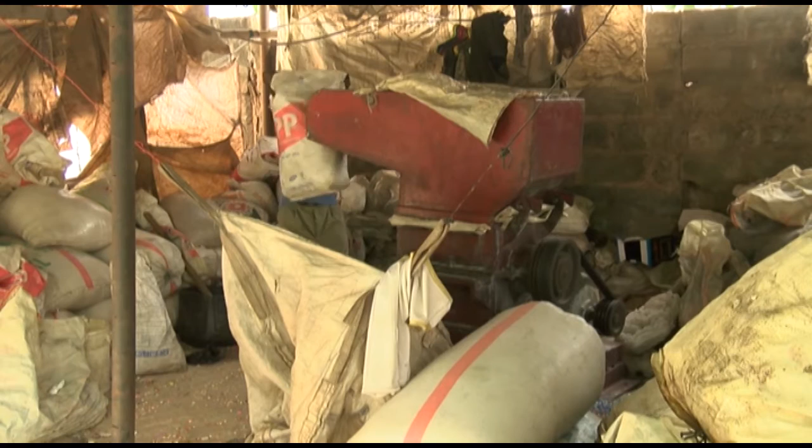After about 5 years of trading on it, I now decided to go into the full production of plastic manufacturing. In the course of doing that, I started with buying molds. There's things we call molds. I started buying the molds. I bought in that year, 2004. I have no machines.

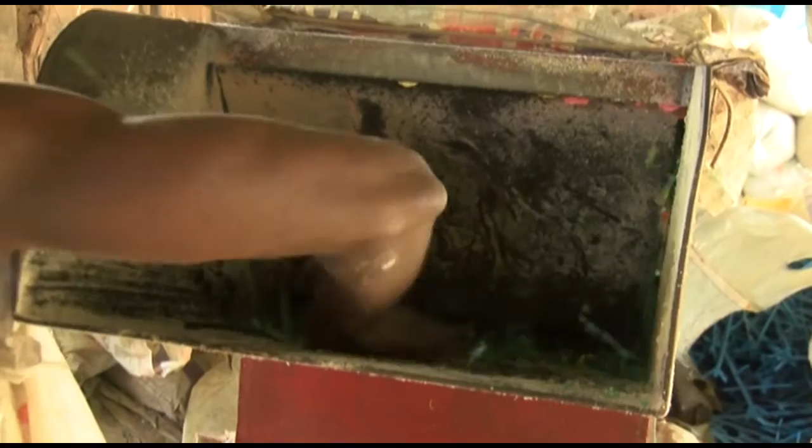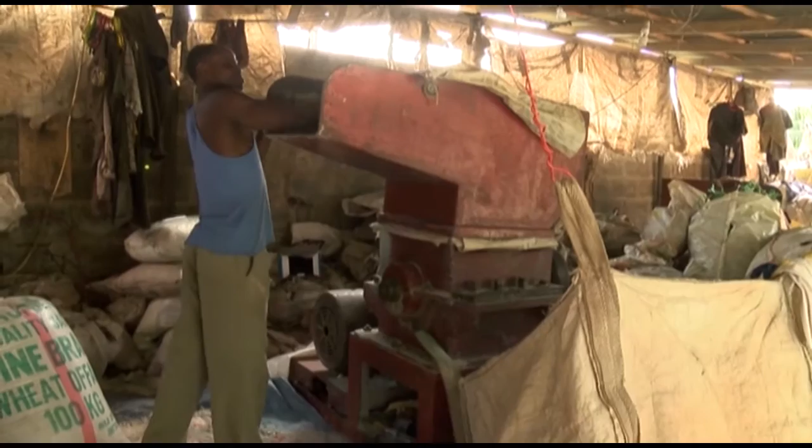We go for what we call contract production. We meet people who have machineries. We give them our molds, and they produce for us, and we pay them, while we now supply the industry. So after about 5 years, or less than 5 years, we started thinking of doing the production ourselves. We started buying the machines, though fairly used then. We started buying the fairly used ones. We started producing. It was really moving.

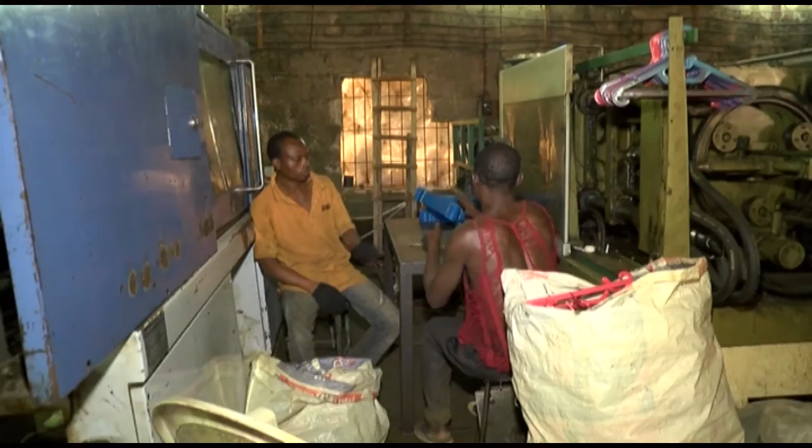As the demand for plastic packaging for pharmaceutical products increased, there was pressure to meet up with supply. We needed more machines because we had more customers. Then we approached the BOI Anambra State government for loan. Initially, when we go to other commercial banks, their interest rates are very high, say about 27–28%.

But when we approached the BOI, the Anambra State government, the interest rate was a little bit considerable, 10%. So they gave us 2 machines last year. They commissioned it. We started producing.

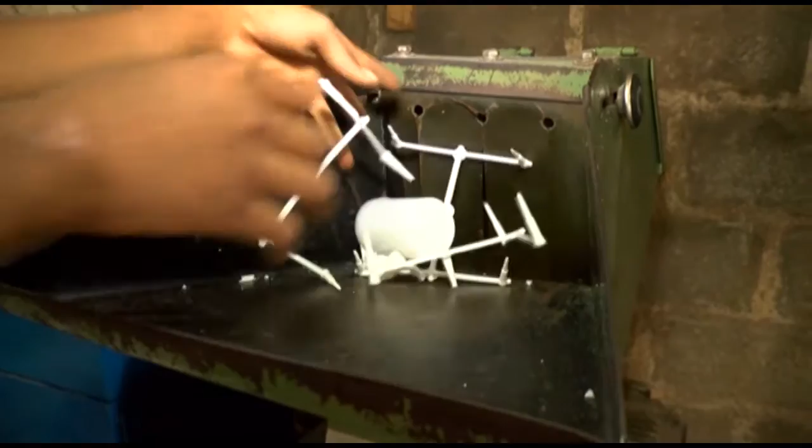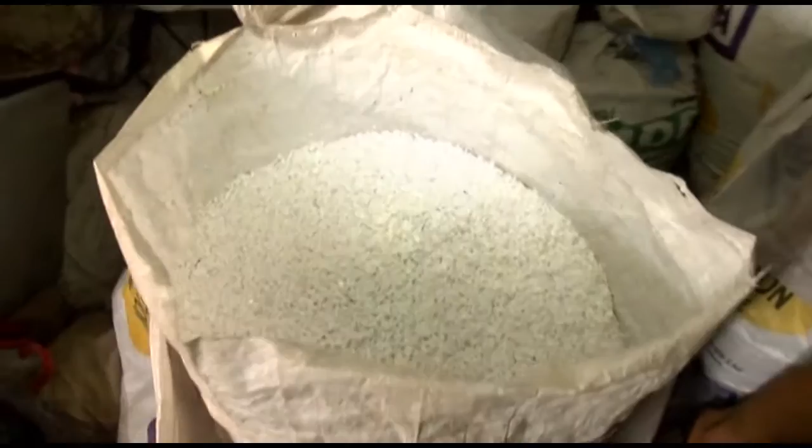The manufacturing process of plastic packaging is quite simple, provided the right machine is used. Raw materials are like this. You go down now, you will see that we buy them locally from Indorama Eleme Petrochemical, made in Nigeria. That's where we source our raw material. And this raw material goes through the hopper.

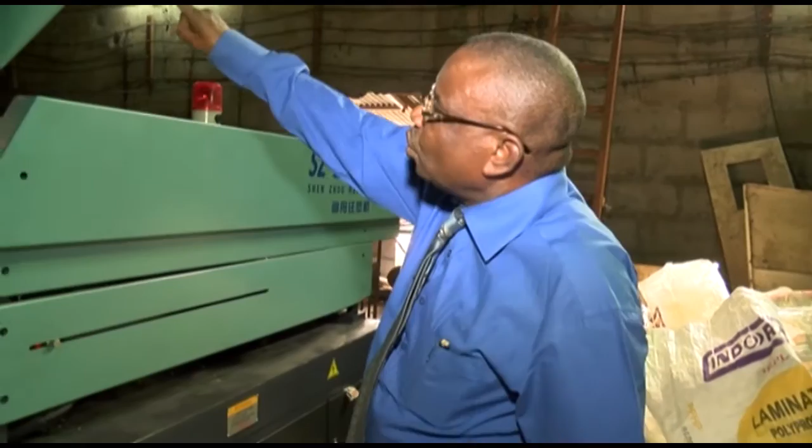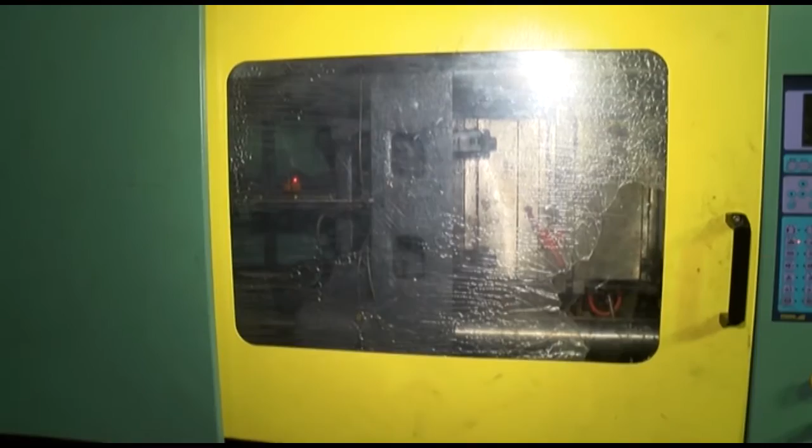When it goes through the hopper, it now melts in the barrel. We call this barrel. It melts and goes through the barrel. As it goes through the barrel, it comes here, it melts and gets into the mold. When it goes into the mold, as the mold closes, it will now inject. As it injects, it will now form this plastic container that will drop on its own. Now it is dropping.

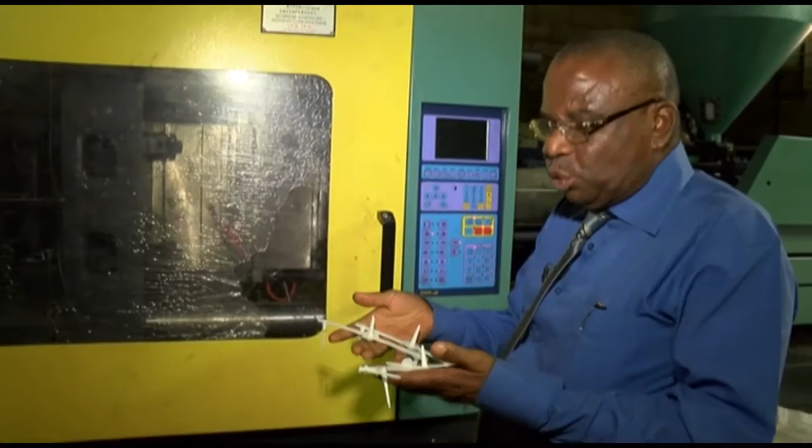Good. So when it drops together with the waste, because these ones are waste that we can recycle in the near future. We can use them for plastic hangers. And this material is purely virgin because they use it for pharmaceutical packaging because it is edible. So we don't use recycled materials for these products because they are purely for pharmaceutical packaging.

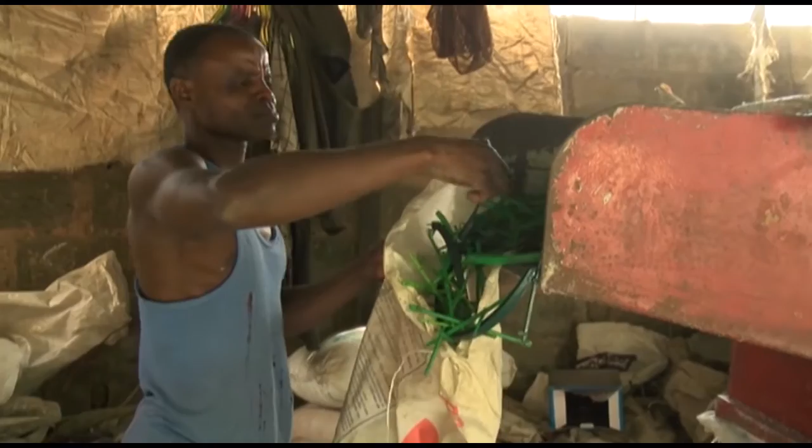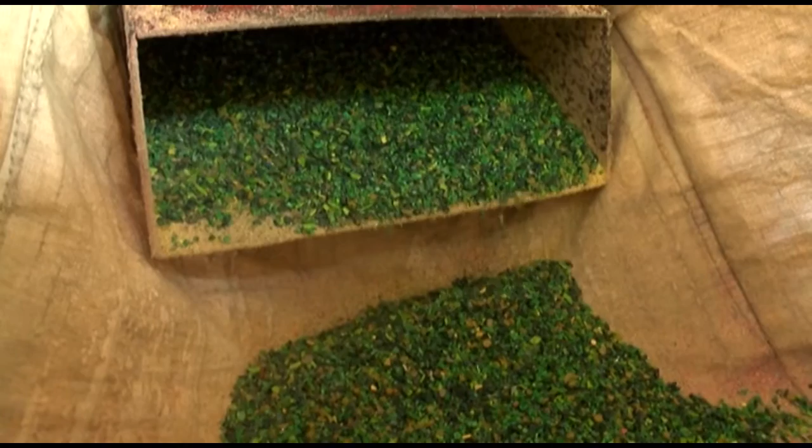In this business, nothing is left to perish. The waste from the production process of the pharmaceutical packaging is taken through the crusher and converted into pellets. These are then reused for the production of hangers. The plastic hangers, we use the recycled materials. That is more reason why most of our materials, we don't have waste. The runners we have in our product, we now recycle them, put them through here, where it goes the same process to make the plastic cloth hangers.

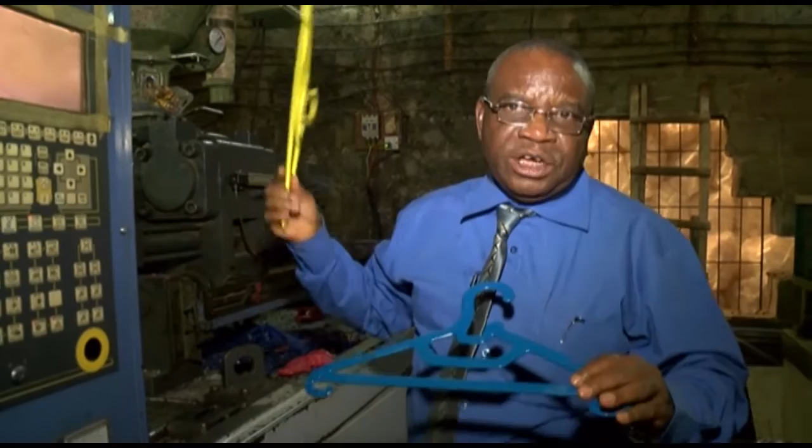And they are already made in Nigeria. So we didn't say made in Africa and in China also. We really have that in our business, made in Nigeria.

We were in Abuja sometime last year to showcase our products at the presidential villa. I showcased this plastic cloth hanger. He saw it and said the cloth hangers are very beautiful. But the problem he has is that here is so narrow that big jeans could not get into it.

So when I saw it, after about 2 months, I traveled again to make a new one, now to make a very good clearance so that I can have enough room for more jeans. You can pack 2-3 jeans here, unlike this one that is so narrow that you cannot pick up 2 or 3 jeans. So I've corrected that now. And I'm proud of that because it's marketable right now.

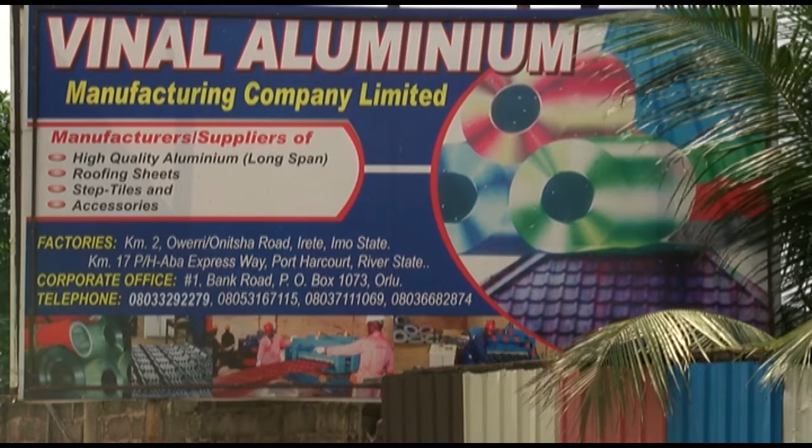Vinal Aluminium Manufacturing Company is located in Owerri at Kilometer 2, Owerri-Onitsha Road, and in Port Harcourt at Kilometer 17, Aba Expressway, Port Harcourt in Rivers State. The company is into the manufacturing of high-quality aluminium sheets, roofing sheets, step tiles, and building accessories.

It was incorporated in 1996 and run by the Group Executive Director, Augustine Izuagba, a graduate from the University of Nsukka. He tells us why he chose the business. In my third year, courtesy of strike, I found myself staying at home. And I said, okay, rather than whiling away my time at home, I should go and learn something.

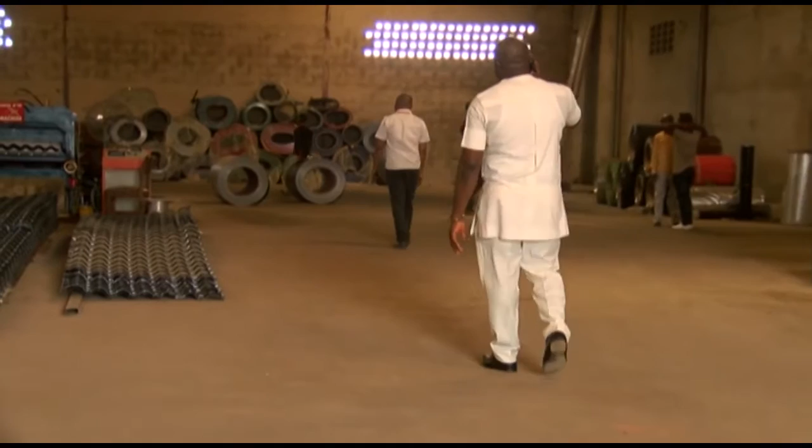As if I knew that this country is drifting towards a situation where you have to be self-reliant. You don't have to depend on government to give you a job. So I had to go and learn this roofing technology, aluminum roofing technology, for a few months of that strike.

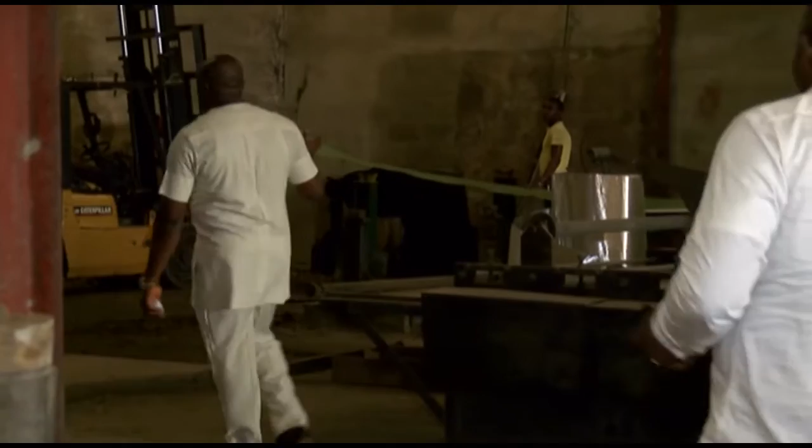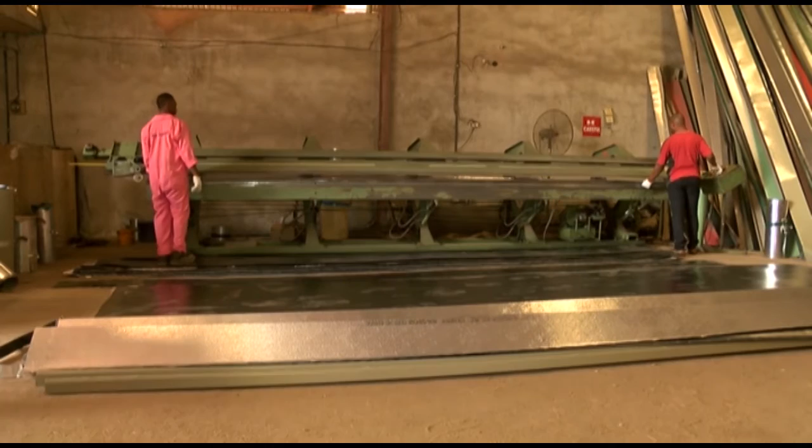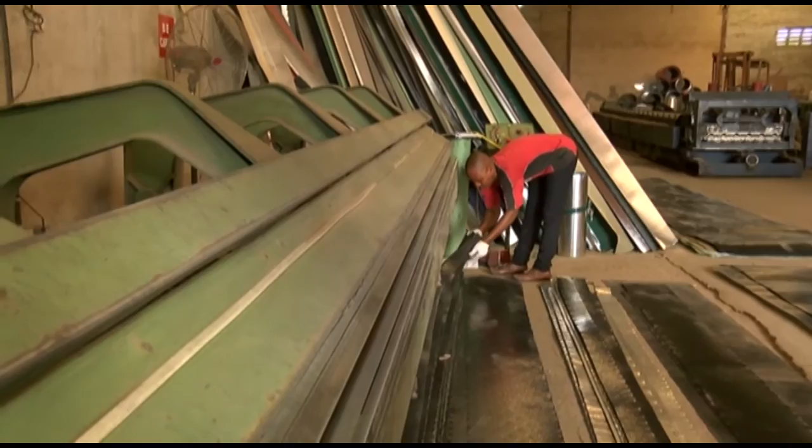And we started from there with a small shop at Orlu in Imo State as well. So just like child's play, it started growing. We started running around for the business with a motorcycle, because this business has stages. If you're starting from scratch, meaning you don't have money to establish a factory, you start by being a subcontractor.

Maybe if you see where they're building a house, you go to the site, meet with the owner or the engineer who is the main contractor, ask him to give you a job. If eventually after considering the tenders they have, they find yours interesting, they'll give you the job. So that was the way we started.

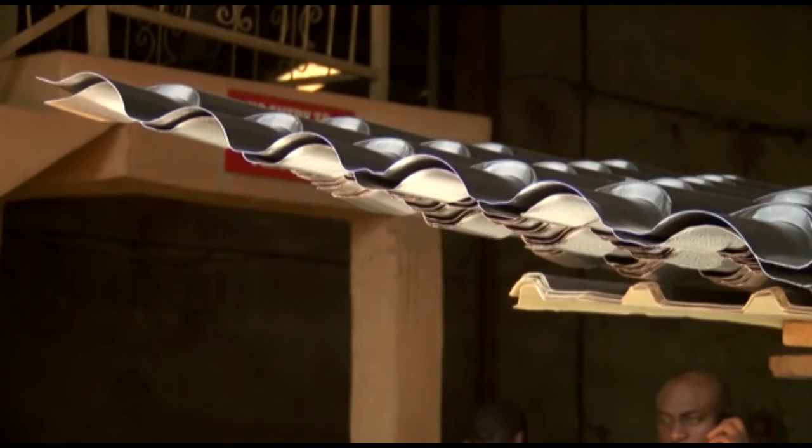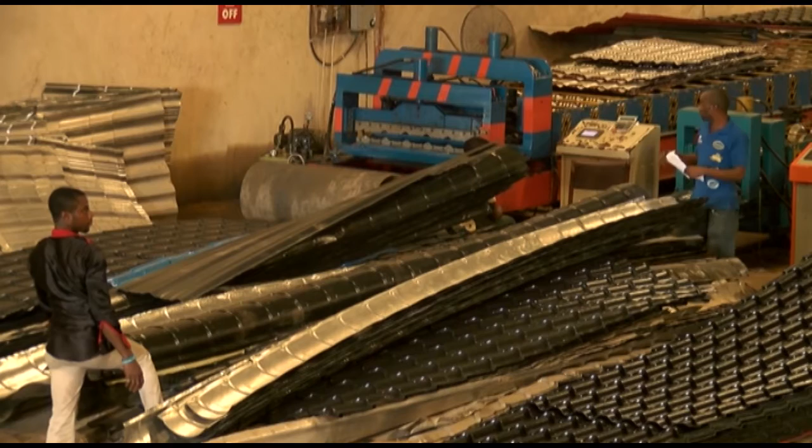With resilience and determination, the business began to boom and add value to the economy. It took us 3 years to complete the factory structure. That will tell you the kind of savings and the kind of resilience we allowed, because we had a focus and we had a place we were edging towards, so we had to allow a good level of prudence to come into our spending.

We were managing ourselves with the motorcycle, small car, just like that, to make sure we're able to save some money to get this to the level. So we had to build the factory, then equip it with machines. We started with 2 machines.

Elated Augustine Izuagba recalls how he engaged the Bank of Industry and how the support he received has boosted his business. The very first time we approached Bank of Industry was in 2011. Early 2014, I got a call because we have lost hope. I was happy. Life came into me again.

I said within myself, is this thing not just a waste of time? Could this thing be possible? We were made to understand that securing BOI funds is only meant for the bourgeois. Sometimes I'll call them, I'll ask them, this thing you're doing, can't we give you some tips to do it? Because they said they give tips to BOI people, that you have to spend some money to get it.

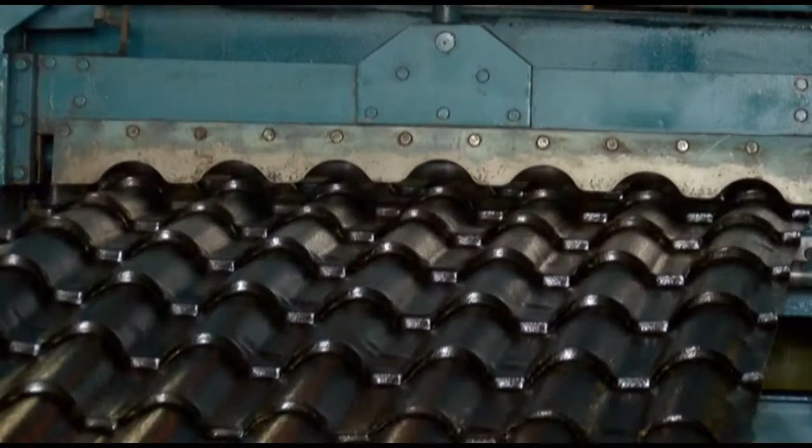I still said, in Nigeria, is this still possible in this country? And finally, I got that money without spending 1 naira. So I'm so happy for BOI. And now we have procured the machines. We have started using them. They are working.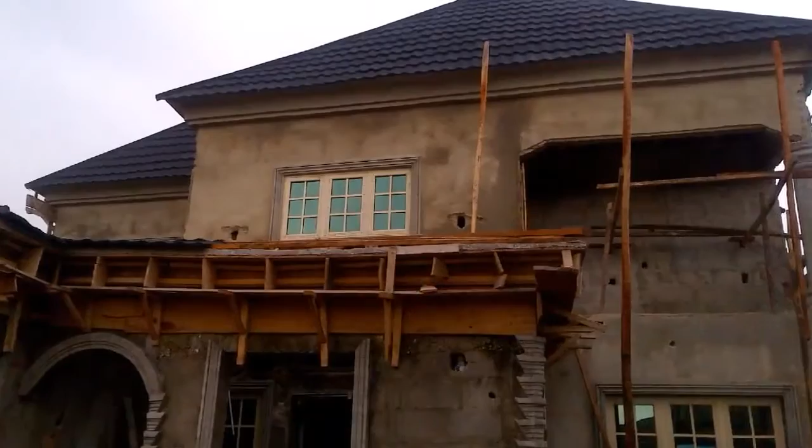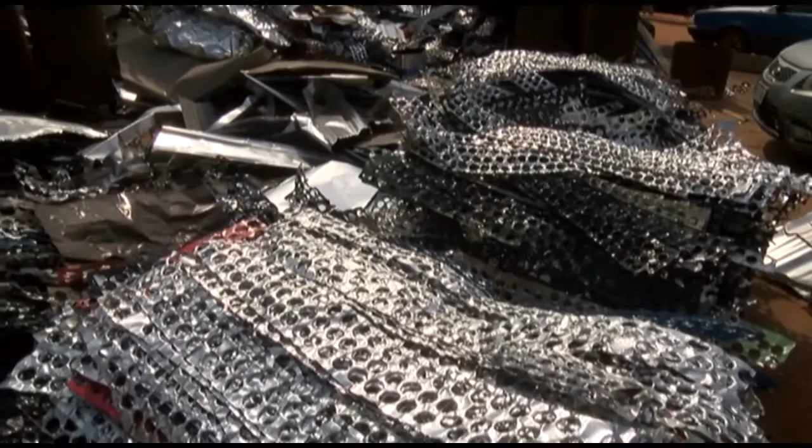Metal roofing is the most common type of roofing in this part of the world. It is more affordable, very durable in cold weather, and made from a high percentage of recycled material, which are 100% recyclable. The use of aluminium as a roofing metal is always a better option for many building projects since it resists corrosion and requires little maintenance. Aluminium also tends to reflect heat better than steel, thus keeping a house cooler during the summer. Aluminium roofs will last about 35 years.

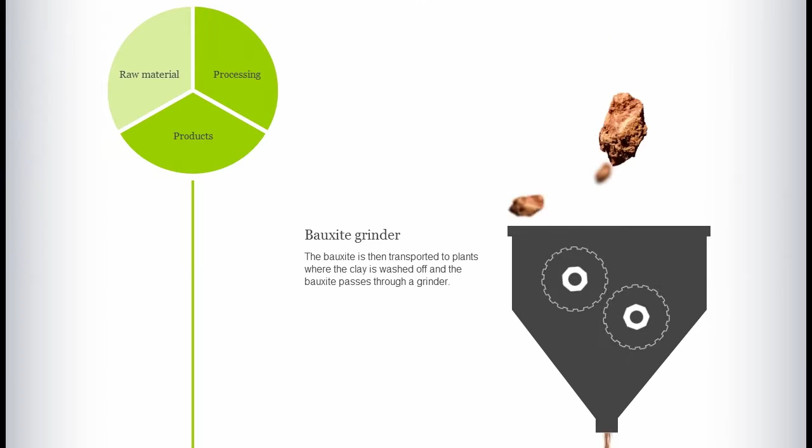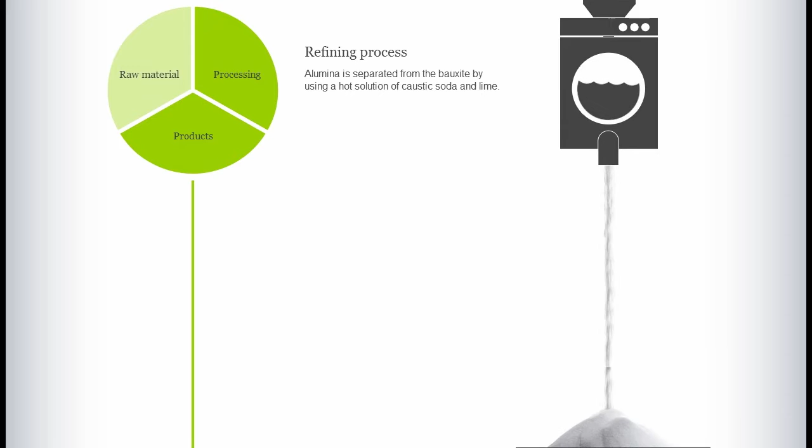Aluminium production starts with the raw material bauxite, a clay-like soil type found in a belt around the equator. It is mined from a few meters below the ground. The bauxite is then transported to plants where the clay is washed off and the bauxite passes through a grinder. Alumina, or aluminium oxide, is extracted from the bauxite through refining. During this process, alumina is separated from the bauxite by using a hot solution of caustic soda and lime. The mixture is heated and filtered, and the remaining alumina is dried to a white powder.

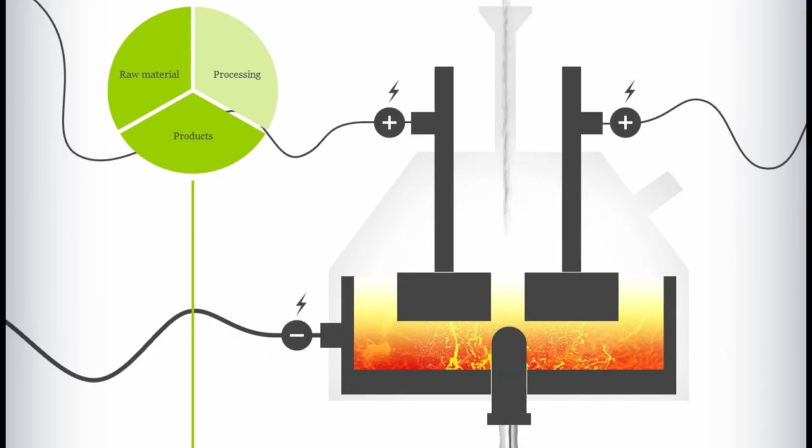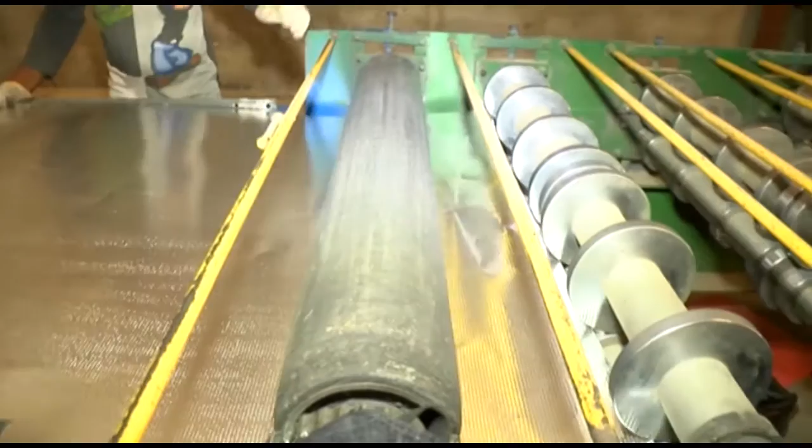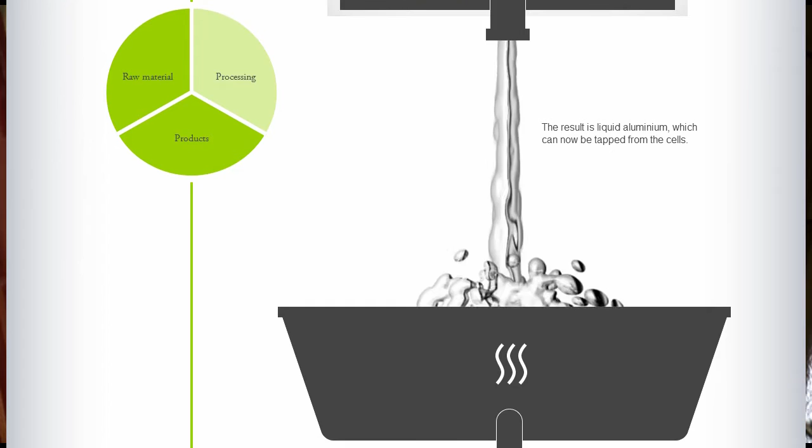Next up is the metal plant, where the refined alumina is transformed into aluminium. Then companies like Vinyl Aluminium Manufacturing can use them to make other products. We are on the second phase of aluminium processing, aluminium roofing sheet processing. The first stage is the procurement of aluminium ingots. Aluminium pigs, they are in pellets form. You melt them through the process called smelting. You smelt them, produce them into flat sheets, aluminium coils.

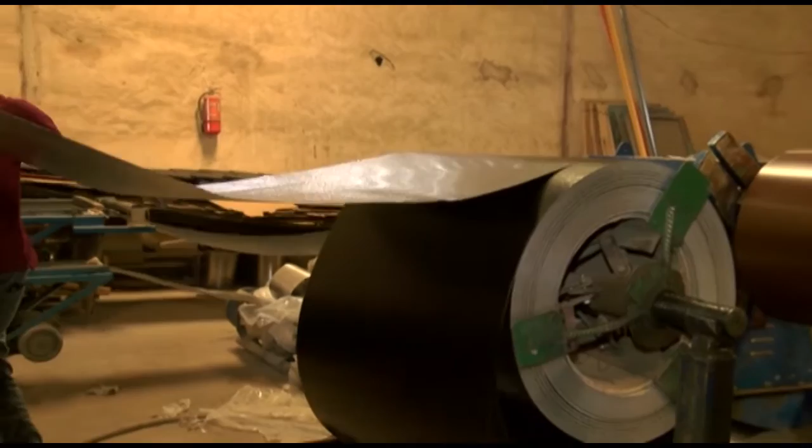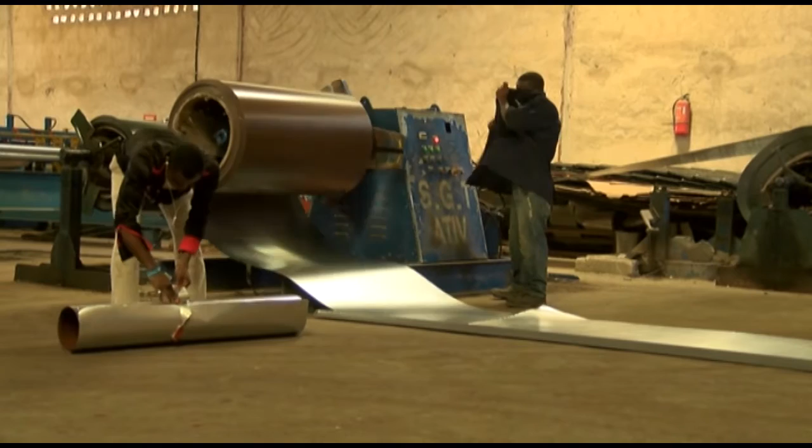So in that process, it's called aluminium smelting plants, which is what we used to have those days at Ikot Abasi. They have Ikot Abasi, they mine and they smelt as well. Then companies like First Aluminium, Tower Aluminium, they have what we call rolling mill. They roll it into coils. So our own stage is the conversion, getting the coils and converting them from coil sheet into a finished product of roofing sheets.

This is the factory. There are two stages of production here. This area is used for the production of step-tile roofing sheets, while the other area is for the production of regular roofing sheets and the production of the flashings. They call them the trimmings.

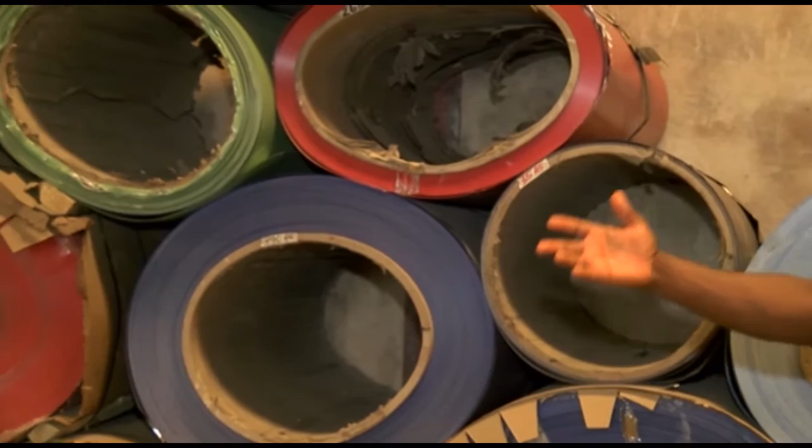These are the raw materials. They come in this form before they are processed and it comes out as a roofing sheet. As you can see, they are coupling it in a coil roller where it will be fixed on the rolling machines, which will eventually produce it into roofing sheets.

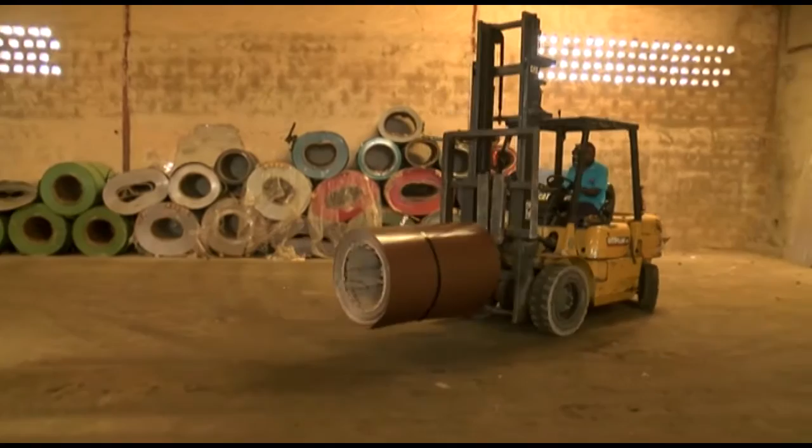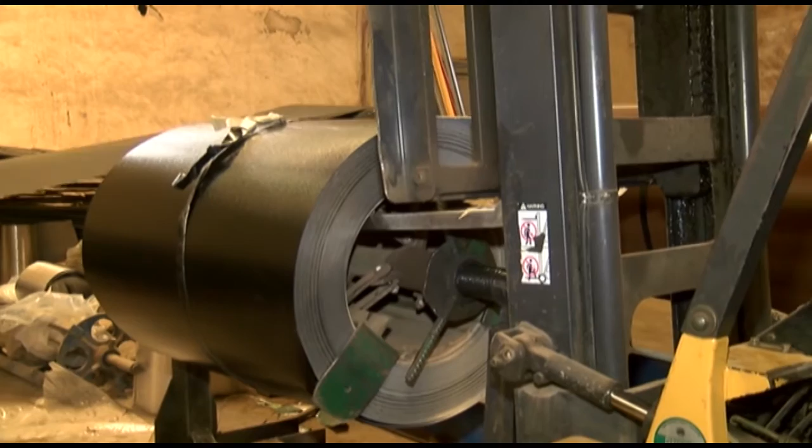The forklift loads the bound aluminium sheets onto the roller. The roller then feeds the corrugating machine where it is being shaped into predetermined designs.

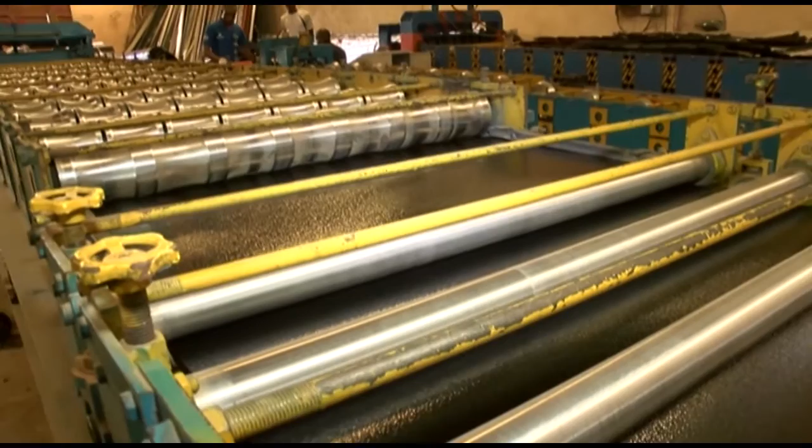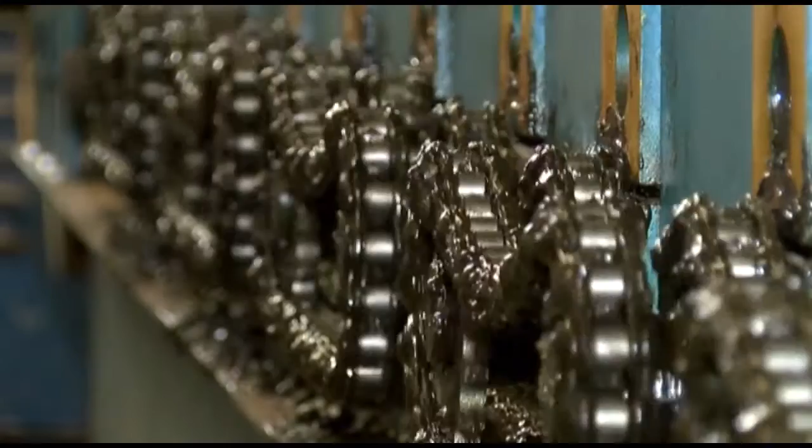Corrugation is carried out through the process of roll forming, and roll forming is a continuous bending operation in which a long strip of sheet metal is passed through sets of rolls mounted on consecutive stands, each set performing only an incremental part of the bend until the desired cross-section profile is obtained.

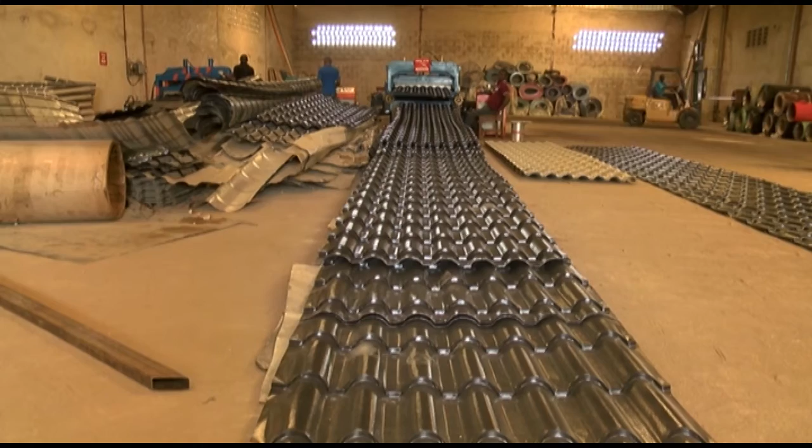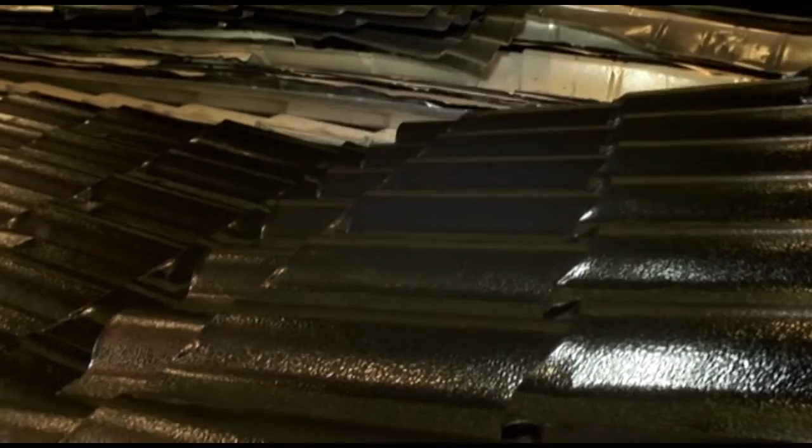This modern process is highly automated to achieve high productivity and low cost associated with labor. After the sheet metal passes through the rollers, it is automatically sheared off at a desired length. The standard shape of corrugated material is the round wavy style, but can be easily modified to a variety of shapes and sizes.

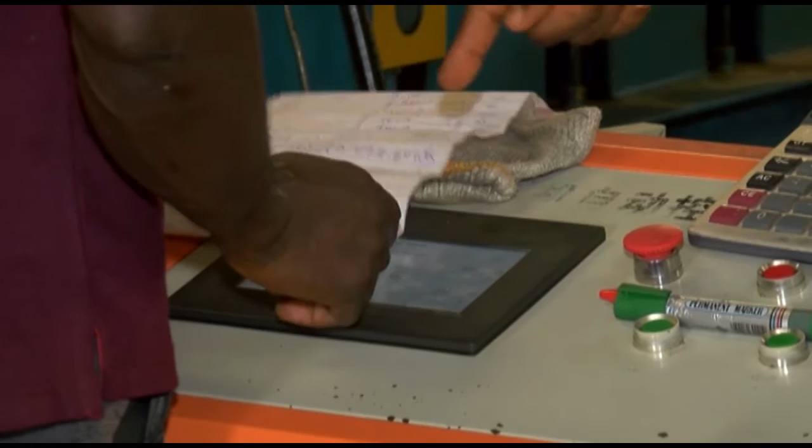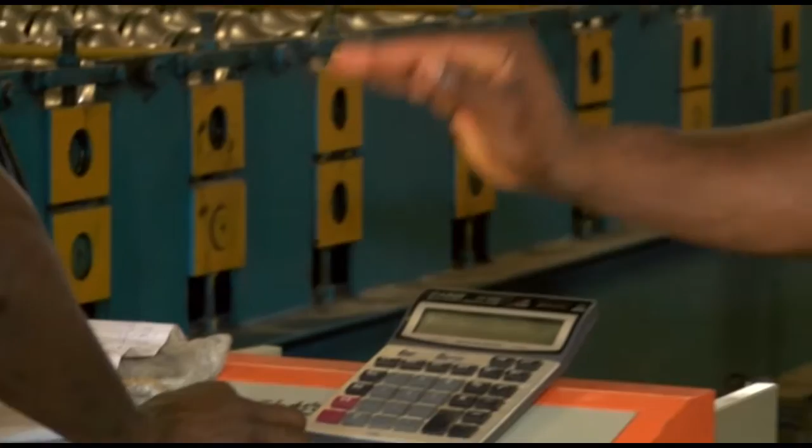What the young man here is doing is to key in the lengths of the roofing sheets to various lengths of the building. You know, as sizes of buildings vary, so their lengths of the roof vary as well. So he has keyed it in here so that the production is a computerized one. Once he has set it to auto, it will start producing without anybody going there to do anything on it. So it produces all the lengths for a particular building after keying in. So that's what he's doing.

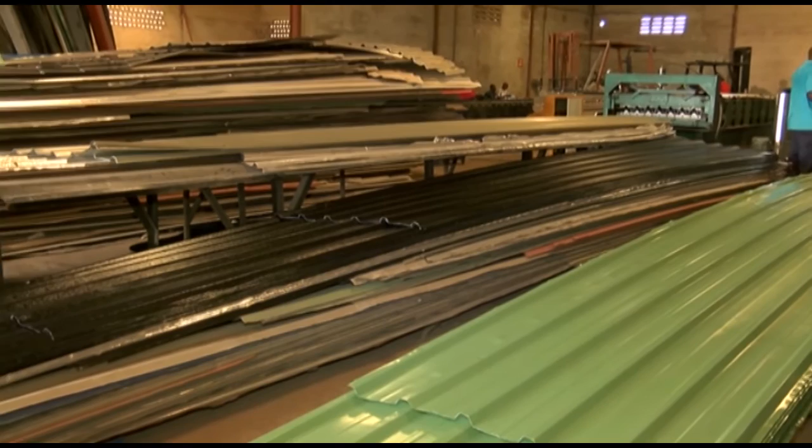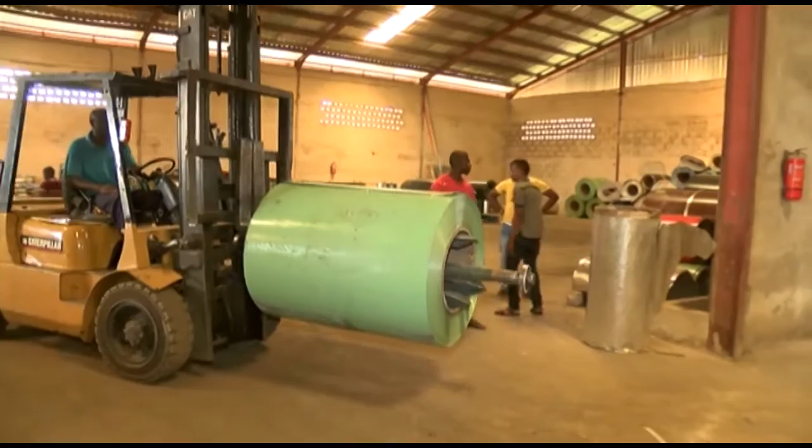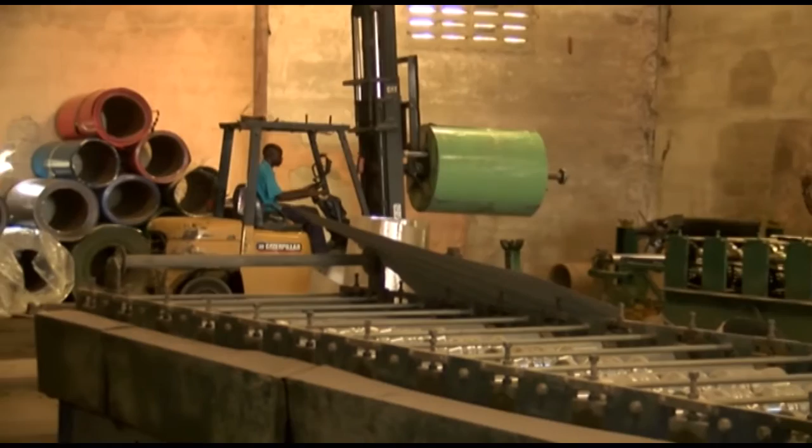On the other side of the factory, the popular roofing sheets are produced using the same raw materials, but a faster process. This machine is quite different from the first two machines that we have visited. This machine is called the regular roofing sheet producing machine. It produces the regular roofing sheet that is commonly known by everybody.

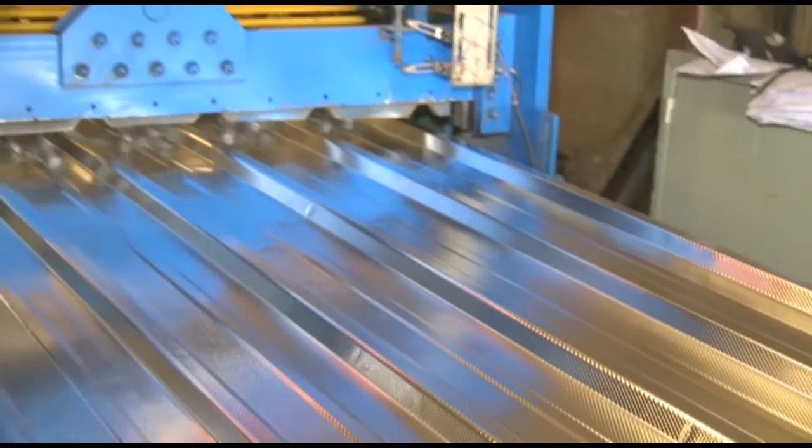The production processes are quite easier, and the finished products are easier to install up there. It is commonly used by virtually everybody in Nigeria who builds houses. Nevertheless, the same raw materials are still being employed on this machine.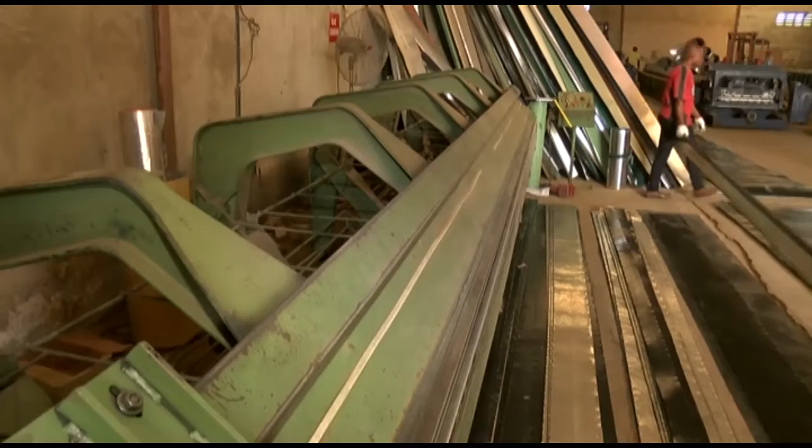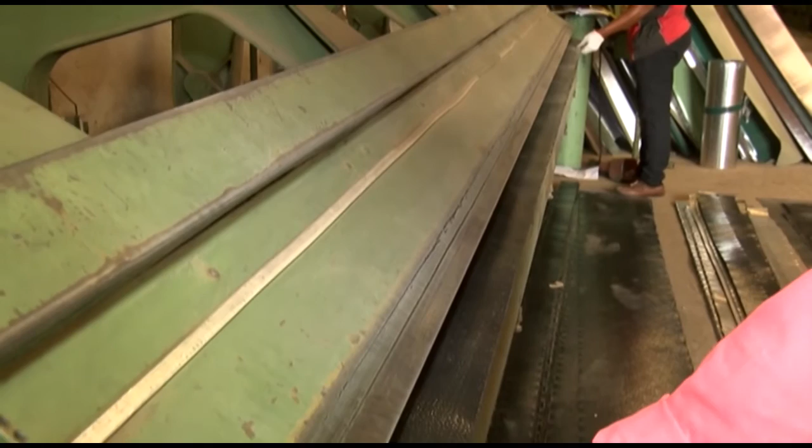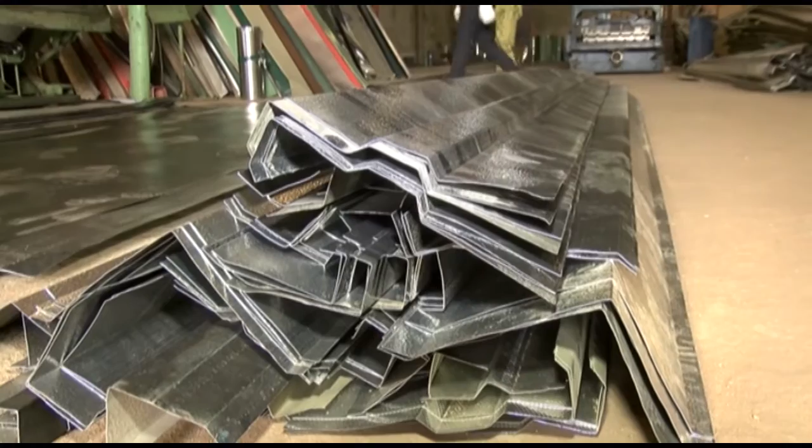And finally to the finishing section, where the trimmings, roof gutters and barge boards, among others, are made. This is the last stage of our production, where we produce the flashings, the trimmings. All these long sheets you see here are meant to add a finishing touch to a building. And if you roof a house without the application of these materials you see here, the building is not yet finished. So this is meant to add a finishing touch to the building, where it will look good and look beautiful.

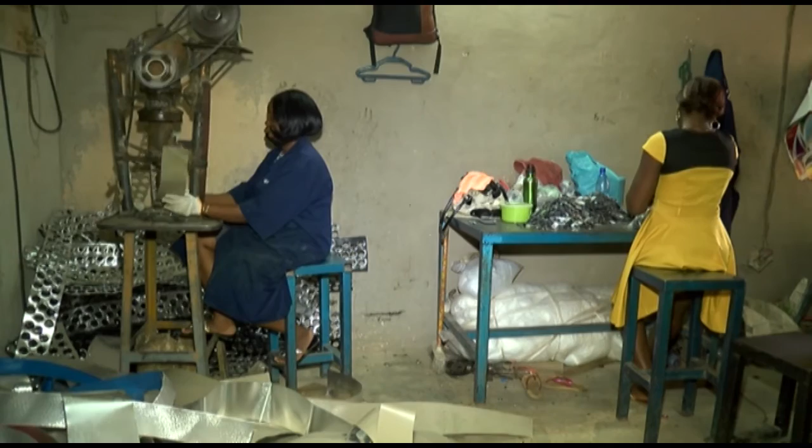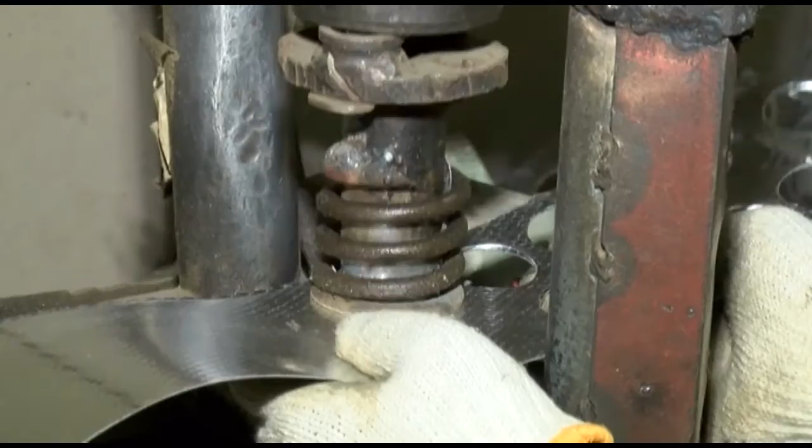Another exciting part of this business is that there are no wastes. What is considered byproducts are used for the production of building accessories like nails, hooks and felts. The soft aluminium sheets are punched into flat pellets, so also is the soft patterns, which are then stringed together to make hooks. And in the case where there are more leftovers, they are sold as scraps for further recycling process.

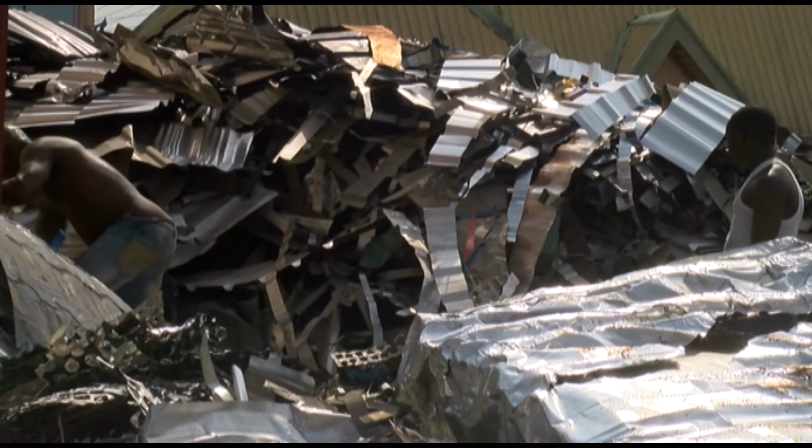The future for this business definitely is limitless. If we have more partnership from government, just like we have from the BOI, we intend to go into other areas of roofing products.